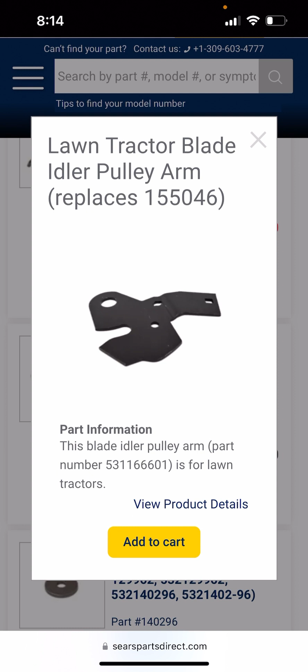The first part of the issue is the idler pulley arm on the mowing deck, which is this piece right here. There's a section on that arm that over time developed a little divot, and that's part of what's currently catching, and part of my current issue.

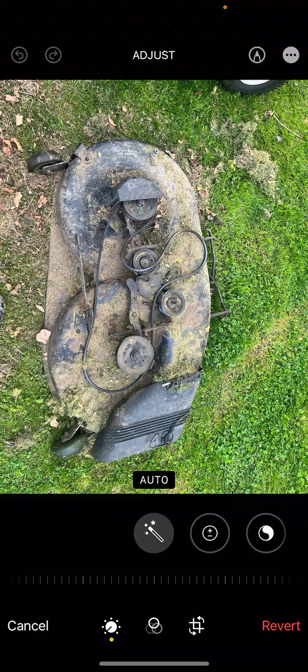This is the deck that I have, and this is a picture of it. Right here you can see that little divot. So that's part of the issue that I'm having, and that developed over time.

The other issue that I'm having, which I think was caused from that holding up and just from time, grass, and wear and tear, is the idler spring broke, which is what's circled right there.

While investigating what was going on, I also noticed that both of my idler pulleys, which are these two pulleys right here, had bearings in them that were pretty much shot. So I'm also going to be getting new idler pulleys.

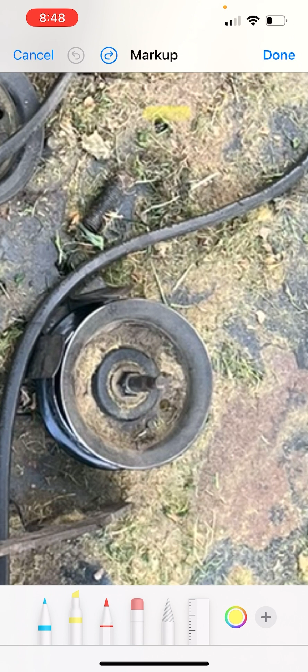And the last thing I'm going to get while I'm ordering parts for this is this carriage bolt here for the one idler pulley. That has a hole at the top that a pin goes through, and that's what the cable connects to for the engaging part of the PTO.

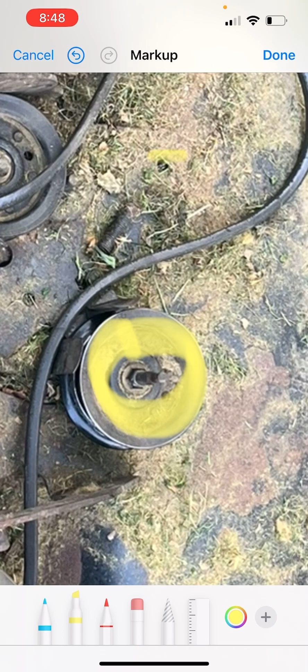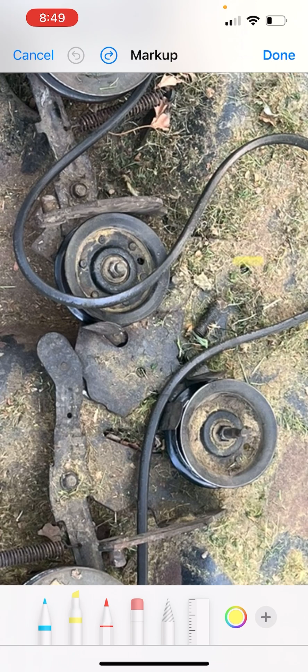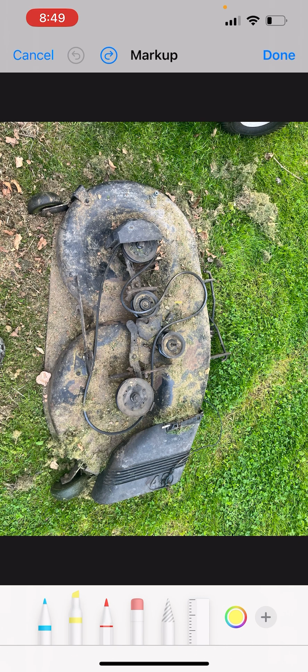So those are the 5 things right now that I'm having issues with. The actual idler pulley arm, I think I'll be able to fix without replacing it - I'm going to take that apart, grind that divot out, and give that a try. But that's not what this video is about. So for the other 4 things I am going to order, this is how I was able to look them up online and find them.

If you don't have this exact lawnmower, or if you're trying to find parts for something other than a lawnmower, that doesn't matter. If you're not sure how to find the model number and serial number, you can either Google it, or find plenty of YouTube videos that will show you where that is on the specific piece of equipment you have.

One other thing I'll show you, which you can also Google to find out, is that on the serial number, the first 6 digits are actually the date this mower was made. So 08 was the month, 01 was the day, and 03 was the year - August 1st, 2003. That's good to know, maybe if you're looking at used equipment and trying to figure out how old it may be.

There's several different websites you can use to look up parts. I'm always working on different things as kind of a side hobby, side hustle, whatever you want to call it. So I do this quite often, and that's how I've kind of learned how to do this.

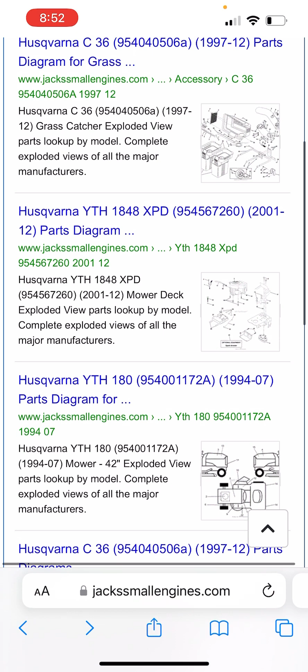I also tried looking up LT1000, and I actually just didn't really trust the results that I was getting. As you can see here, some different Husqvarna things came up. But what I am going to show you, I think this site is a lot more interactive than some of the other ones. It's just easier to use.

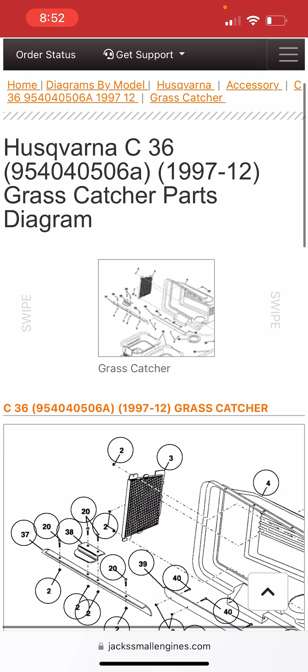This is why: when you come to the different parts pages, which you'll see more of in a minute, and you click on a part, so I'm going to click on 37 right here. What I like about Jack's Small Engines is it doesn't make you go to any additional pages, and from there it will show you the part.

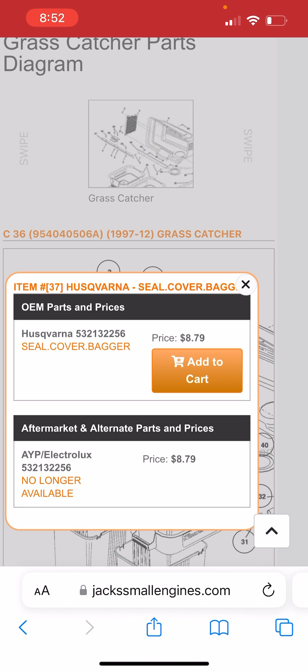Now, a lot of times what I'll do is I'll take that part number, copy and paste it, and then search it in Google, and kind of compare the price. So this is not the part that I'm after right now, but as you can see, it's $8.79. If that was the part, I probably would price check it.

Since Jack's Small Engines did not work out, usually the next thing that I do is I just pull up Google and type in the model number, or if I already know the part number, I type that in. In this case, I did try a couple other websites, and I reluctantly came to Sears Parts Direct. I say reluctantly because I usually don't like going directly to the manufacturer page. It may be me, but I think a lot of times you pay more money when you go straight to that manufacturer. I think there's good aftermarket options available.

Okay, so we're in the page right now, and as you can see, you always want to kind of verify you're looking at the right thing. So our model number was 917-272751. Okay, so we're under the correct machine.

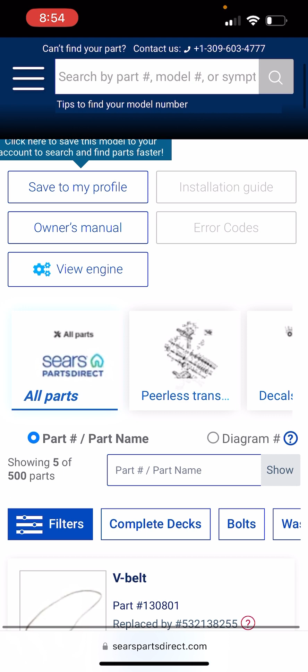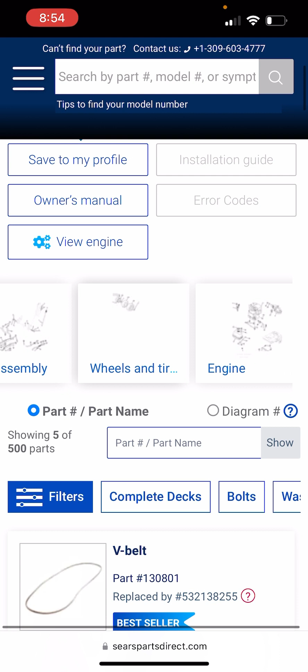Now what we're going to do first, and I recommend on a site like this where you do have to kind of go look for the parts after you look at the diagram, get a piece of paper and a pencil, and then scroll down through the options until you find the section of the machine that you're looking for. In this case, we're looking for the mower deck, so we're going to click on that, and then click into the picture, and we're going to have to click expand diagram.

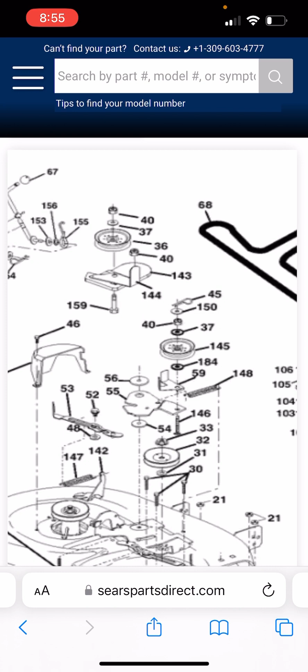Okay, now the first part there, you can see how this is blown up. When you're using some of these different websites or apps, it's a little bit of trial and error. Sometimes you have to use two fingers to kind of scroll around, sometimes one finger will work. Right now I'm on a phone, so on a computer it's a little bit different too.

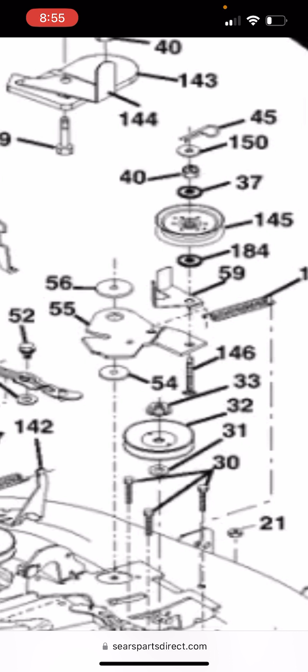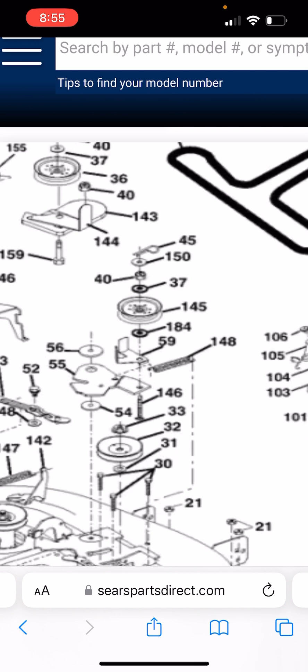So the first thing that did pop up that I said I was going to fix is right there in the center of the screen, number 55. That's the idler pulley arm. In my case, I'm not going to be buying that, I'm just going to try to fix that. One of the first parts that I am after right now is one of the two idler pulleys.

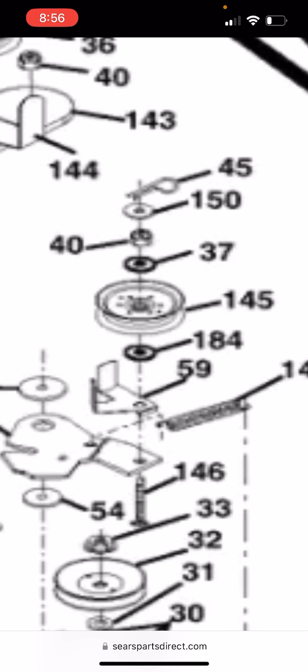Now, it helps if you took a picture of the machine or you're looking at it right in front of you, but I know that this idler pulley is the correct one because I also see that carriage bolt coming up through the idler pulley arm, and then you can see some different accessories and the pulley itself.

So the first pulley that I need is 145 on the diagram here.

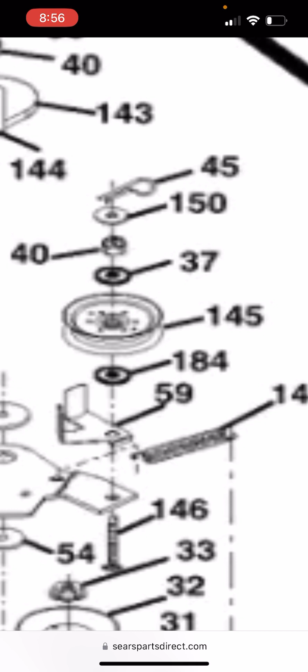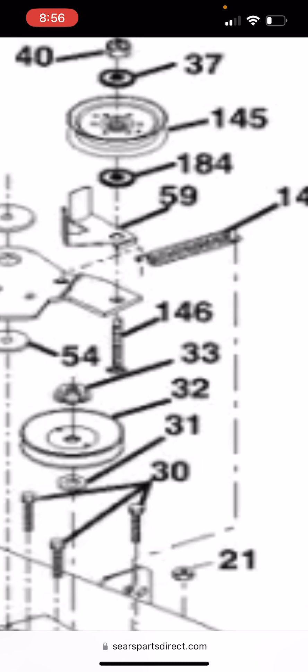And also, while we're looking at the same area, I'm also going to replace 146, which is that carriage bolt. I did notice some wear and tear on that carriage bolt, and I figure if I'm taking the pulley apart, I might as well just replace the bolt too. I'll show you a close-up of that bolt, and you'll see why it's special.

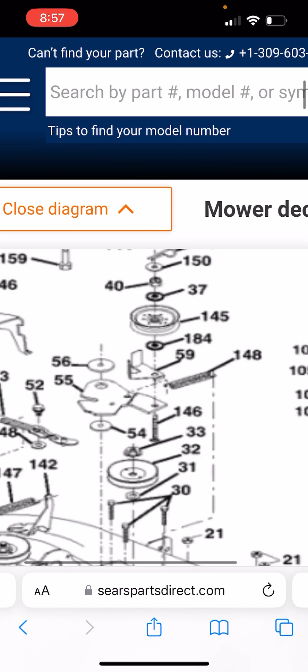Okay, the next thing that I'm after is the idler pulley spring, which is 148. That was the spring that was broken that pulls that idler pulley arm back.

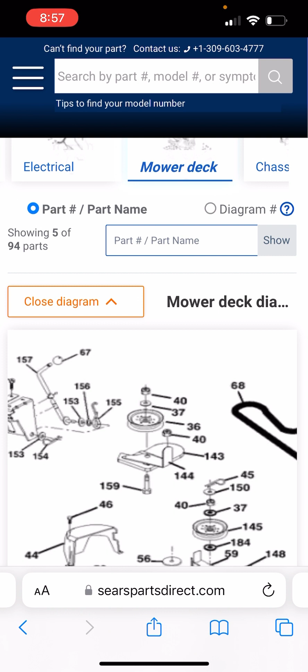And the last one that I'm after is number 36. So that's the idler pulley on the other side. Slightly different than the first idler pulley that we looked at.

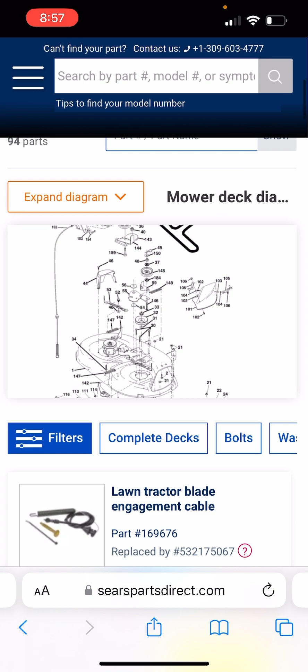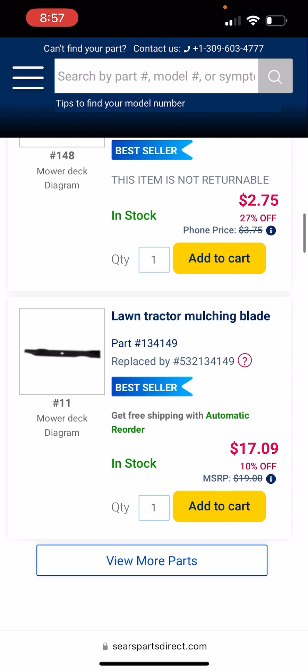So what I've done, I've wrote down these numbers on a piece of paper, and I'm not going to sift through all of these. This site, I could not figure out how to basically filter through these faster, which is usually the case for me. Like I said, a lot of times that's why I prefer Jack's small engine, at least for initially looking up part numbers. But in this case, I don't know if Jack's small engine just doesn't carry those parts. Even if you are finding the right model number, on some of these different sites, you may find parts that they don't sell anymore. And if you go to another site, they do still sell them.

Okay, so the first thing that I saw here when I'm scrolling is 148. That is that blade idler spring. So we're going to click on that. And so this is the part that I'm after. As you can see, it's $2.75.

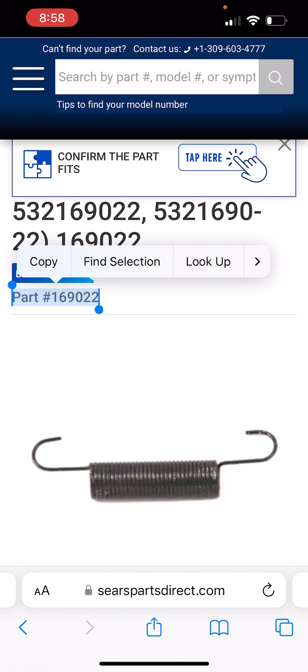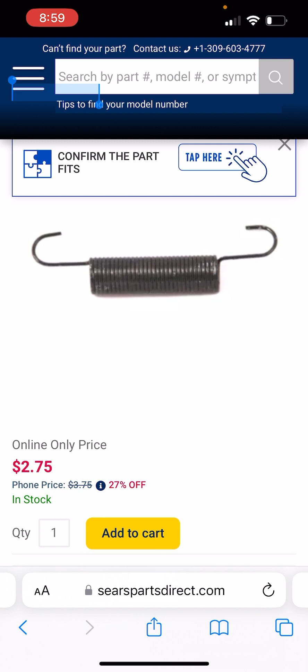Like I was saying earlier, a lot of times what I will do as I'm sifting through these is I'll copy and paste the part number. And so Jack's small engine does sell this. A lot of these parts are interchangeable on different machines, so they still have a machine that sells that part. But you can see it's $2.96 on Jack's small engine, and $2.75 on Sears Parts Direct. So in this case, this is the better price.

It's obviously a cheap part, so I'm not going to look too much further.

Okay, what I've done off camera is I've just gone through and I did the same thing. I just kept scrolling down through the list. It wasn't in any kind of order. And I basically found all my parts and just added them to the cart.

Okay, the rest of this should be pretty self-explanatory no matter what site you go to. Obviously, next you're just going to continue through your checkout.